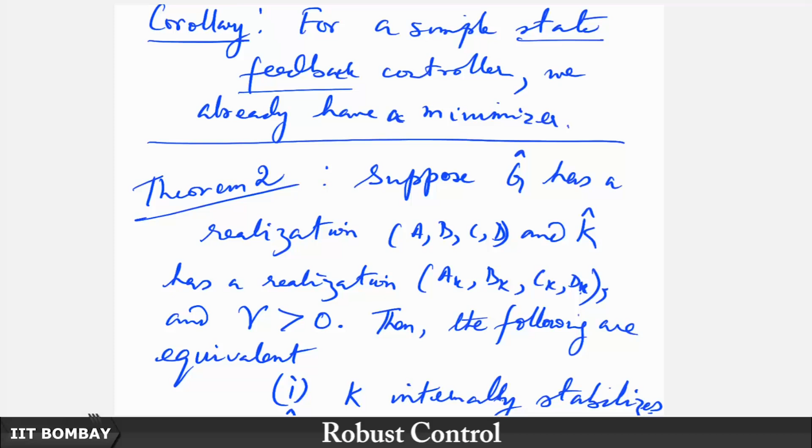If you now focus on the screen, this is the theorem. Of course this is not really a major theorem, but what it says is that if you have this G and the controller in this standard feedback configuration, then whatever will be the norm of that feedback system, it will be the same if you had just flipped the inputs and outputs at the plant and controller terminals, both of them. So you take this G prime and K prime, G hat prime and K hat prime, it would have the same norm exactly.

This has got everything to do with the fact that the way to evaluate the norm goes via the route of evaluating the observability and controllability gramian. When you use the controllability gramian, you are concerned with the trace of C x C Hermitian, where x is the controllability gramian. If you go via the observability gramian, it is B Hermitian y B, where y is the observability gramian. In other words, no matter which route you take, you will end up with having the same norm of the system. They are one and the same, by obtaining the trace of the corresponding gramians sandwiched between either the B and B Hermitian or C and C Hermitian.

So that is what we have seen earlier. Now this result should therefore come as no surprise. But the even bigger result, or the more important result that we saw prior to that - we will not go through the proof because we have spent considerable time on it - but even the main result actually takes quite some time to digest because it has got so many of these things. So let us quickly recapitulate what these subparts or these clauses entail.

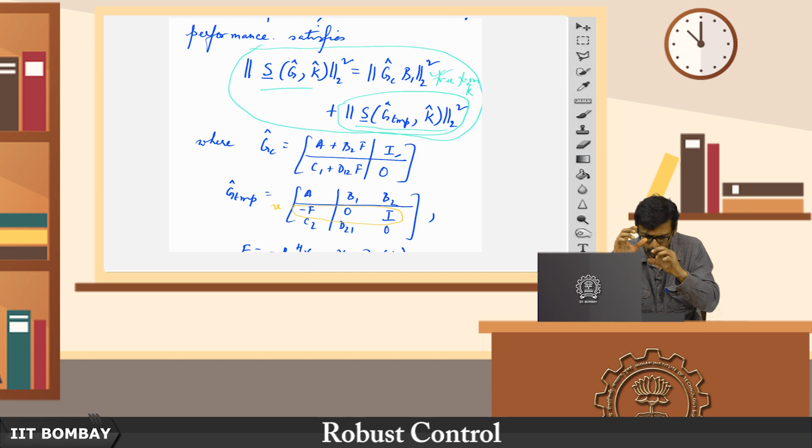Now, in the process, we say let us compose. Notice that what we are using to compose these new auxiliary plants, when we are composing G C hat, everything is known here apart from F. So F is an unknown, remember that. Then we are composing this G hat TMP, once again F is the only unknown, everything else is known. So it turns out that we compose these two auxiliary plants where there is one unknown, which is F.

So you might already be getting the hint that F is basically something we have to solve for, that we have to evaluate, which would allow us to design this controller in the first place. Now we say, what is this F? Here you see it is B2 Hermitian X. Again, B2 is something we know, but X is something we do not know. So this X is something we do not know here.

What is X? Now, X is given by the solution of this Riccati equation, which is constituted by the elements of the Hamiltonian HC. Now you ask, okay, what is HC? So the first step was what is F? In answer to what is F, we found that it is something that depends on X. Then we ask what is X? In answer to what is X, we are led to looking at this, what is HC? Now we see that HC constitutes of nothing that is unknown to us.

So if I now retrace my steps back, here is how the controller design should proceed. Just cut to the chase, here is the utility of the theorem. One thing is to understand the proof of the theorem, which is important, but it should also be apparent to you. You should not get confused in this jungle of words and variables and stuff, so much so that you lose sight.

So here is the deal. I give you a plant G hat. That means I tell you what A, B1, B2, C1, C2, D12, D21 are, and I say that this plant at least satisfies these conditions. Again, A, B1, C1 being stabilizable and detectable, along with A, B2, C2 also meeting the same conditions, is not very restrictive. In fact, that is the bare essential you need in order for a stabilizing controller to exist. So it is not too much of a demand.

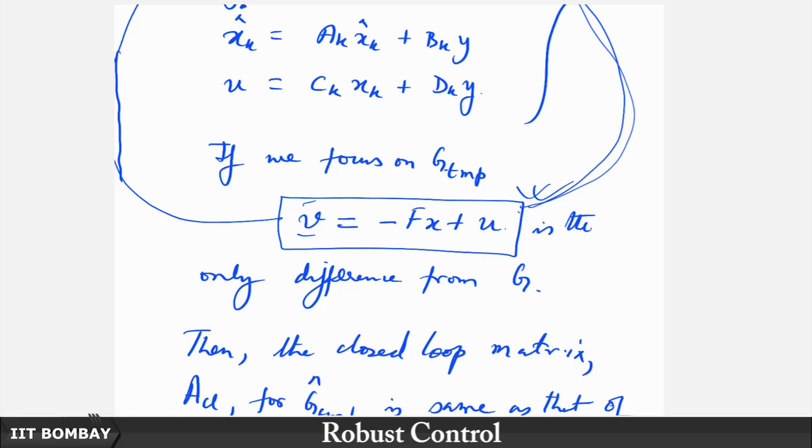So we did some more algebraic manipulations, and I am sure we did it in some sort of a hurry in the previous lecture. We cooked up this E hat, and you might be wondering where is this E hat coming from, why am I suddenly interested in something like this. It is like somebody has whispered something in my ear magically and I have come to know of it. That is not the case.

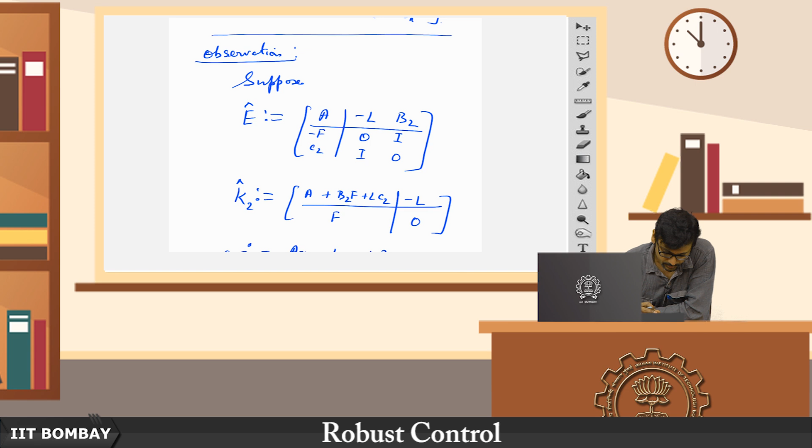So let us try and understand why this E hat was important. Maybe I should have done it a little later, but it is okay. We have already derived and shown that this particular E and K, the star product of E and K, has a norm equal to 0, where K is given by this particular controller.

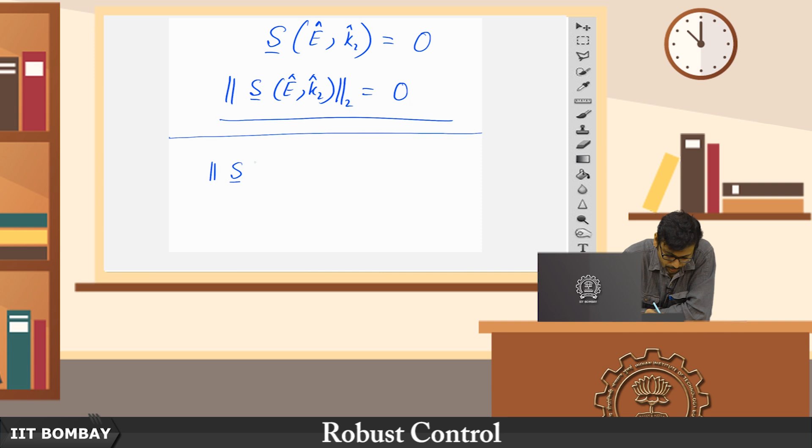Now how does this help? Notice what are we aiming to do? Let me draw a line and start today's lecture. So what are we trying to do? We are now concerned with trying to minimize the star product's norm, where the star product is between G hat TMP and K hat.

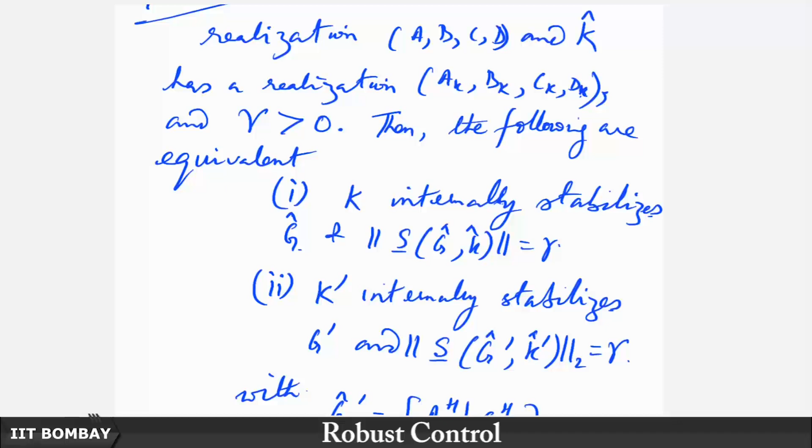I can get rid of the square here, but notice that we have already shown by theorem 2 that minimizing the norm of G hat K hat is the same as the norm of G hat prime K hat prime, where G hat prime and K hat prime are obtained by transpositions and Hermitian operations on the respective ABCD matrices. So A changes to A Hermitian, B changes to C Hermitian, C changes to B Hermitian, and D changes to D Hermitian.

That is what this prime operation entails, and in doing so, we have claimed that the norm does not change one bit. So therefore we can now essentially turn our attention towards restating our goal in a different language, which is tantamount to minimizing the norm of this star product G hat TMP prime K hat prime.

But you might wonder how does this help? Recall a previous lecture or a couple of lectures back, we had defined what this G hat TMP is. Based on our understanding of the prime operation, go back to the notes you have taken down in the preceding lecture to see what G hat TMP is, and you will observe that G hat TMP prime will look something like this: A replaced by A Hermitian, and whatever was in the place of the C matrix for G hat TMP will now be replaced with the Hermitian transpose of the C, or the B here. Let me just write it down, because that will make things clearer.

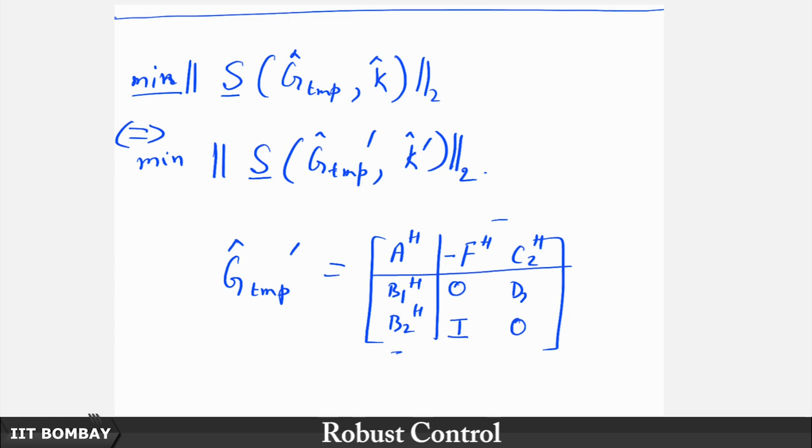And here we have B1 Hermitian, B2 Hermitian, which were sitting in this place here in the original G hat TMP. Also, we will have 0, 0, these do not change, but now instead of the identity here, we will have the identity here, and instead of the D21 here, we will have the D21 Hermitian over here. So, this is our G hat TMP prime.

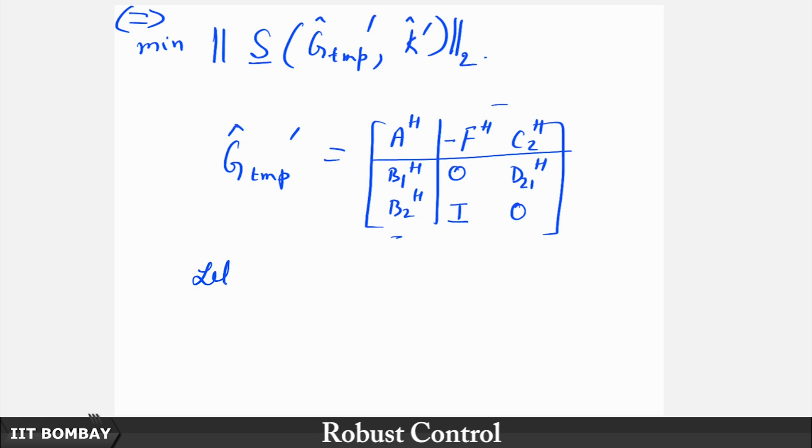And let us replace K hat with K hat prime, okay. So, what is K hat prime?

So, then now we turn our attention to this fellow. This is what we are now going to be interested in. Great, now what do we get?

In order to understand what this fellow's norm entails, the star product of G hat TMP, again you see this is totally contingent upon what we choose as our F here. So, maybe the F is known here, but now what are we going to decide? There is going to be something undecided, like the unknown here. Remember in the previous case we had the F which was to be decided. So, now we will also have to have some other unknown here.

So, eventually I ended up going back after all. So, here was this unknown and GTMP, and notice that this GTMP is now the original plant, whereas in this case the original plant was this. So, everything in the original plant is known. So, now we are saying that everything in our GTMP hat is known.

Instead of F we are going to call it L now. So, we are posing exactly the same problem here. Instead of G hat here, now we will start with G hat TMP prime, and apply the conditions that we had in theorem 1 exactly in toto, no difference whatsoever, because you see now that G hat TMP prime has exactly the same structure with everything being known now, because remember that F we now know.

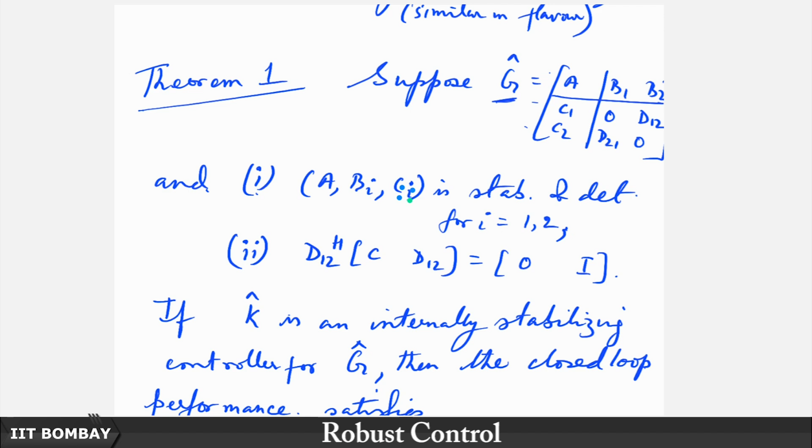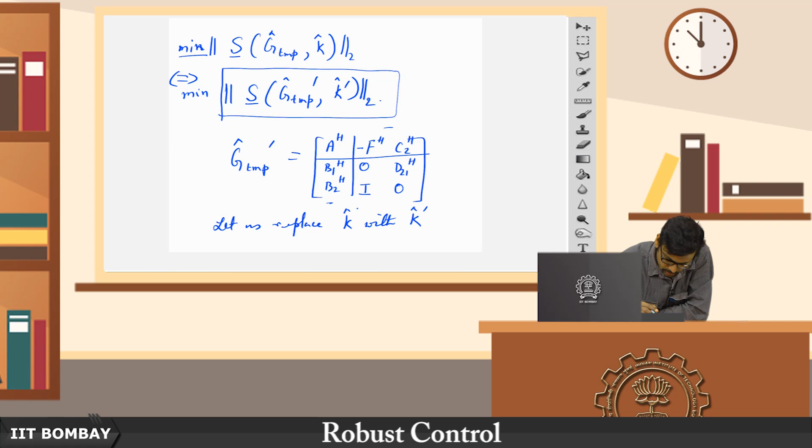It comes from X, X comes from the solution of the Riccati equation given by elements of HC, and elements of HC are again coming from the original plant. So, everything is known here. So, what I am saying essentially now is that this F that we have here, do not treat this as an unknown now, it was much later, here. So, now this F here is not really an unknown for us.

Now, we will have a new unknown which is L, which will be part of our GC. So, instead of calling it GC, let me call it GF. So, GF now in terms of the elements of G hat TMP and an unknown L. Earlier the unknown was F, now for plant being given by G hat TMP prime, the unknown will be L. What will that L be connected with?

The L will be connected with the B matrix, and precisely, to be precise, the B2 element, which is this. So, here goes. Notice very carefully, A Hermitian plus C2 Hermitian L, then you have the identity here, and this is going to be B1 Hermitian plus D21 Hermitian, that is this element coming from here, D21 Hermitian L. Notice in the previous case it was D12, but now the D12 element is replaced by the D21 Hermitian, and this was 0 like before. But this is our GF prime, GF, okay.

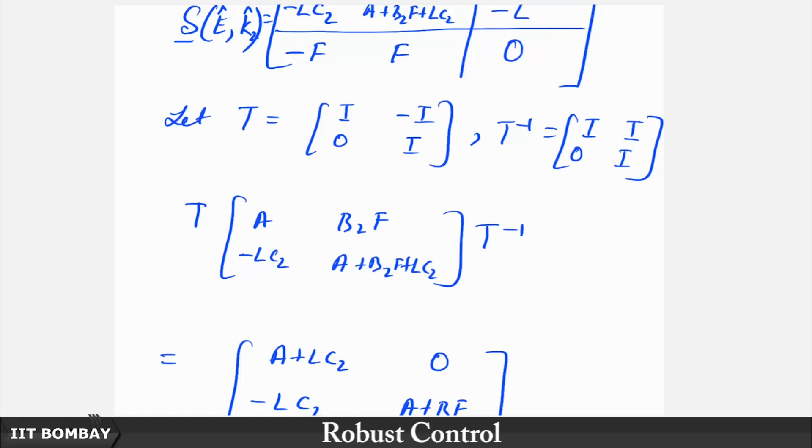So, now that we have this, what is the other element that we have? Now, remember it is like when we had started with G, we had two auxiliary plants that we got. One was this GC hat, which is whose place is now going to be taken by this GF hat prime, not just GF hat, but GF hat prime.

So, what we will now do is, we will have to find the G hat TMP corresponding to G hat TMP. Sounds a little confusing, right? Let me elaborate. On the left hand side here you have G hat, from which you compose an auxiliary plant G hat TMP. Now, you just sort of cover up this entire thing, hang on, you just cover up this entire thing here.

And you focus your attention only on this part. So, now to start with your plant is just this. So, this is now going to take the place of your G hat, or rather this prime of this G hat TMP. So, now for corresponding to a plant that is given by G hat TMP, what will be the G hat TMP now? And this is essentially the crux of the matter, and this will tell you why in the previous lecture we devoted some time towards understanding this another auxiliary plant from nowhere, apparently this E hat. So, observe, now the things will fall in place.

Before that, since we have already defined this GF hat, let me define GF hat prime. That is going to be A plus L C2, the I is going to come here, this is going to be B1 plus L D21, and this is going to be 0.

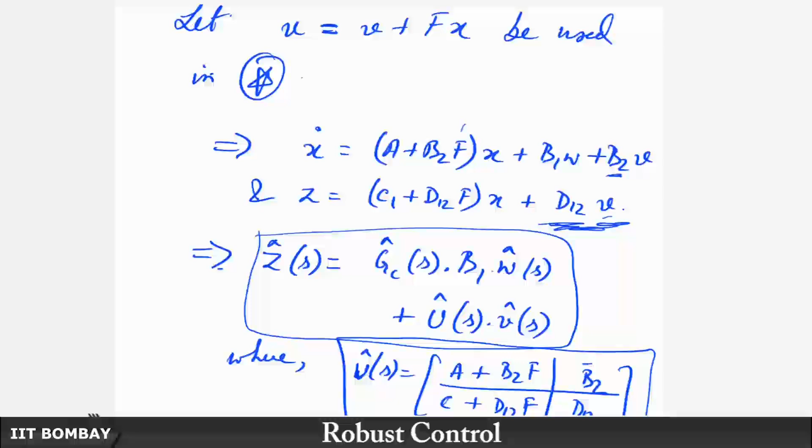Why F Hermitian? Notice very carefully, F Hermitian is sitting in the position of B1, and in the original plant's equation, in the original theorem that is, which we had proved the other day, yes, here it is. Just a minute, oh, this is the proof.

Notice that you had GC hat and B1. Now, GC hat is replaced by GF hat prime, okay, and B1 which was sitting in this location for the original plant.

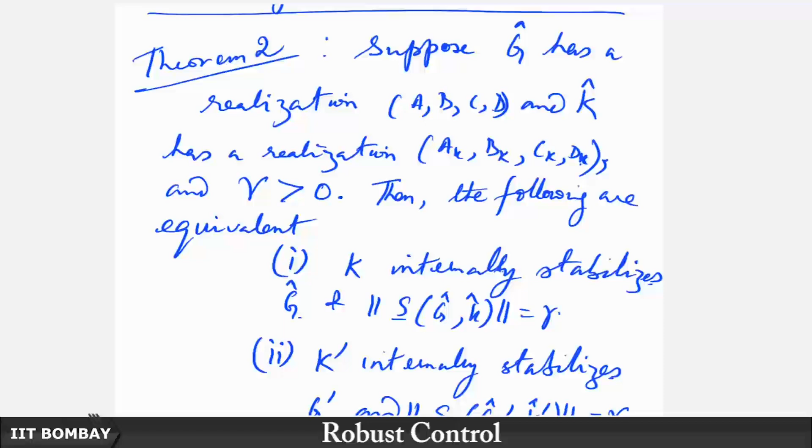Now, you are starting with G hat TMP. So, what is sitting in this location for G hat TMP? Well, it is nothing but F Hermitian rather, if I am not mistaken. Let me check. Yeah.

Where was I? Yeah. So you have minus F Hermitian. Of course, the minus 1 sign really does not matter, because the norm of the negative quantity, if you put it inside the norm, is always going to spit out a positive quantity, and anyway this is squared also, so it does not matter.

Now, what does it get added to? So that is the G hat TMP corresponding to G hat TMP, that is what I meant by it. So this is the funny thing. How did you get G hat TMP from G hat?

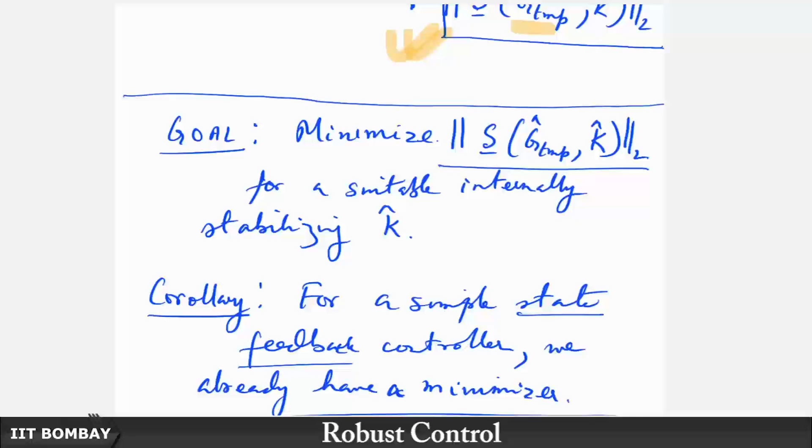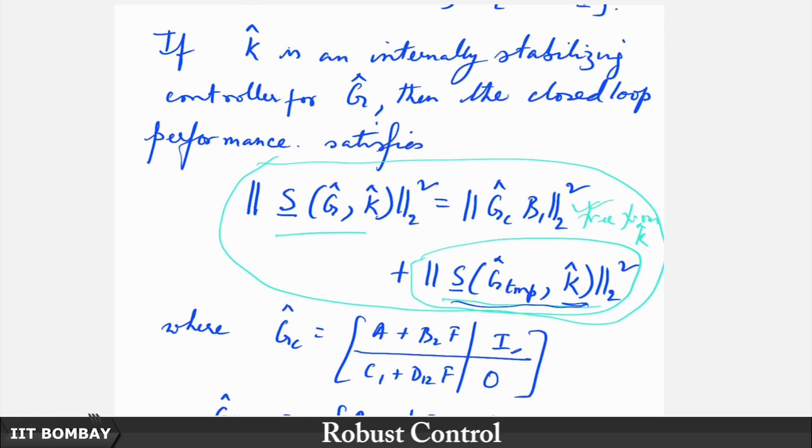Now, we are going to exactly do the same thing to G hat TMP prime to get its corresponding G hat TMP. In other words, when I had a plant, notice the structural changes we made to get G hat TMP from G hat. So what are the things that differ between G hat and G hat TMP? You see, G hat had A, B1, B2, C1, C2, 0, D12, D21, 0. And if you side by side place G hat TMP, A remains the same, B1, B2 remain the same.

The things that change are C1 gets replaced by minus F, which is an unknown. In our case, this minus F will be replaced by L. So that is going to be our unknown. Notice D21 remains the same, C2 remains the same, only the D12 position gets replaced by identity.

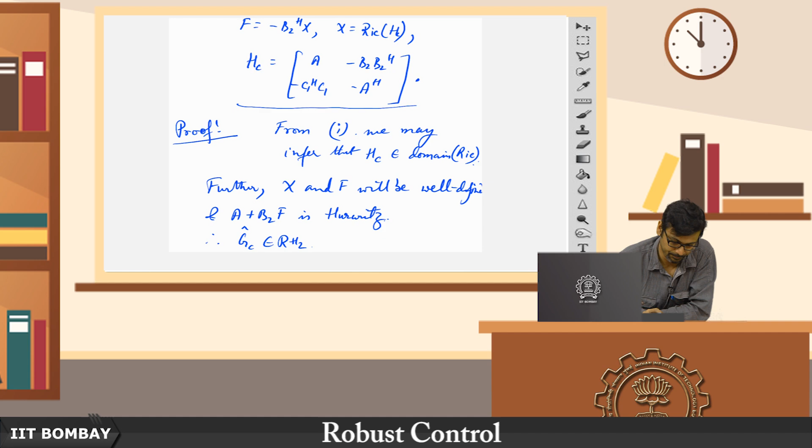So now if I look at what the corresponding G hat TMP corresponding to G hat TMP would be, I would get the norm of the star product between E hat prime, right, K hat prime, where E hat prime is exactly what we had defined in the previous lecture. Notice what was E hat?

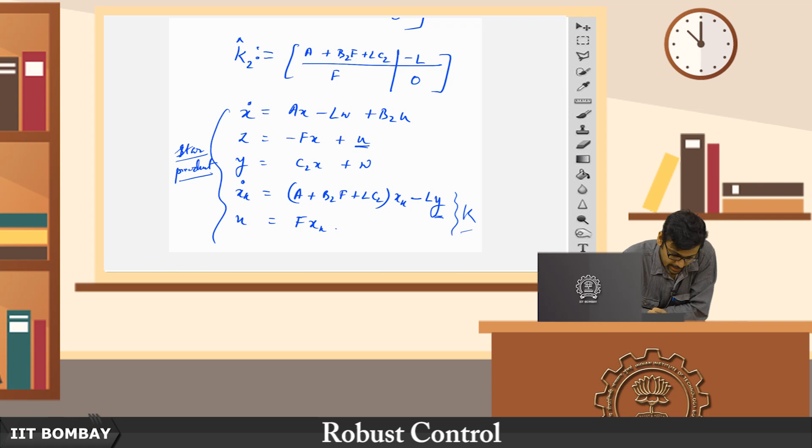Here goes E hat. So observe then what is E hat prime. This is exactly what we had defined earlier. We had almost pulled it out of thin air. We hadn't given any description. I just showed you that suppose you consider this auxiliary system, and I asked you to bear with me and take some things on faith.

So now if you take that on faith, you will notice what is sitting here. If you take E hat prime, you will get A Hermitian replacing A. This minus L and B2 will come in the place of C, so you will have minus L Hermitian and B2 Hermitian here, and in this place of B you will actually end up getting minus F Hermitian and C2 Hermitian. Of course, this identity and identity, it really wouldn't matter.

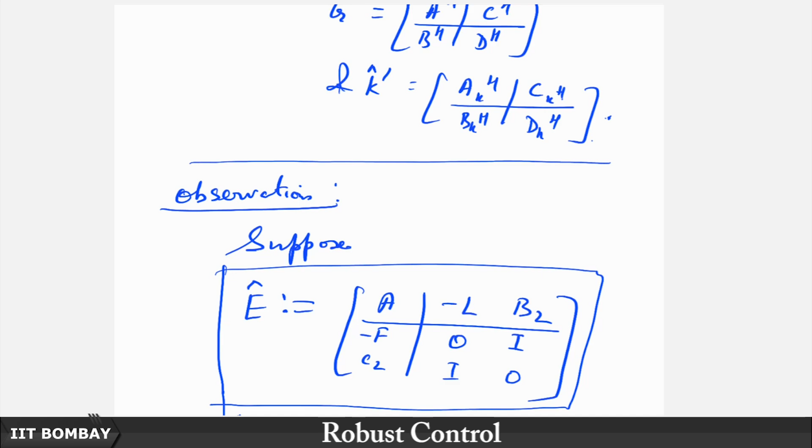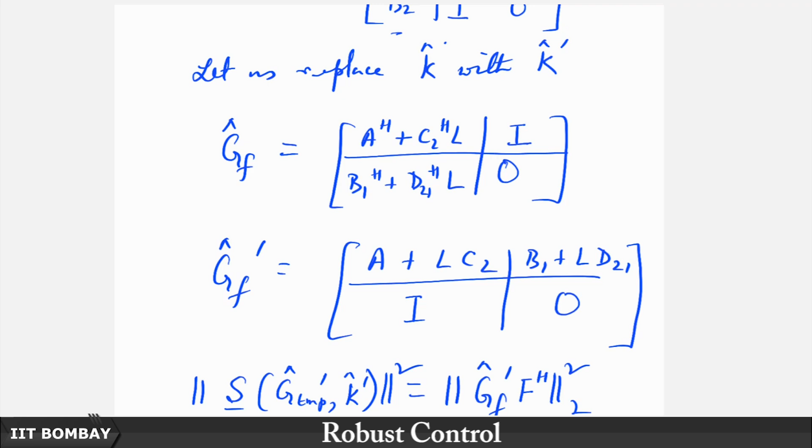So if you start with G hat TMP, then E hat, where E hat prime, sorry I missed this prime, E hat prime is going to be given by, so look at G hat TMP, you will have A Hermitian as before, and you will have the B part remains the same. So it is minus F Hermitian C2 Hermitian, minus F Hermitian C2 Hermitian.

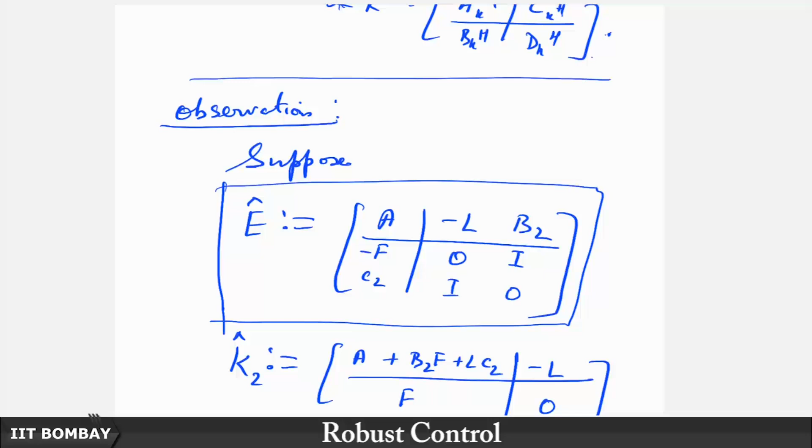What happens to the C? Just a minute. So let us look at how we went from G hat to G hat TMP, that will give us the clearer picture.

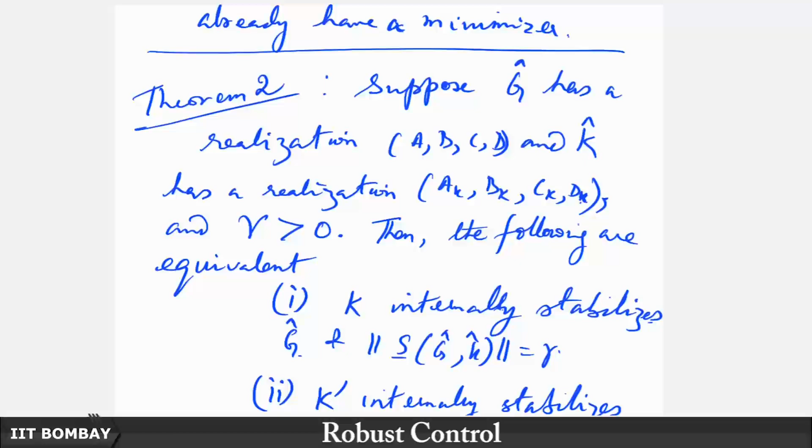Notice that the C got changed - the C2 position remained the same, but the C1 position got replaced by the unknown. Our unknown will be L instead of F, because F is known to us. So we will replace this with minus L, and of course this will be just B2 Hermitian, like it was in G hat TMP.

What happens to this? This element remains unchanged, but this element has to be changed by identity. So you will end up getting 0 I 0.

So now E hat is given by, you just flip the B and C matrices with their corresponding Hermitians - replace B Hermitian with C and C Hermitian with B. The D is also replaced by D Hermitian, but D here is already symmetric, so it matters not what you do.

And A replaced by A Hermitian. A Hermitian's Hermitian is just going to give you back A, this is going to give you minus F and C2, and this is going to give you minus L.

So, there is some mistake here - I have written down this entire thing, but earlier itself I had made a mistake. You see, it is not even matching dimensionally. So there should have been a Hermitian here in the E hat prime.

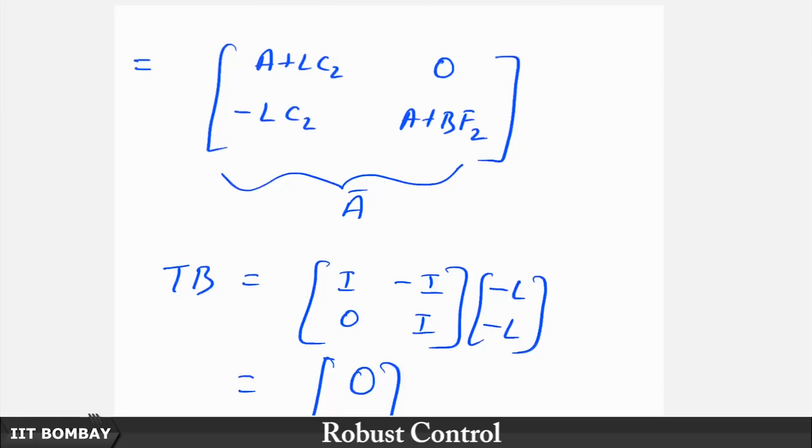If you look at what this E hat system entails, this E hat prime should have had the L Hermitian instead - it should not have been L, it should have been L Hermitian. So that is where we went wrong initially, and we needed to take this into account.

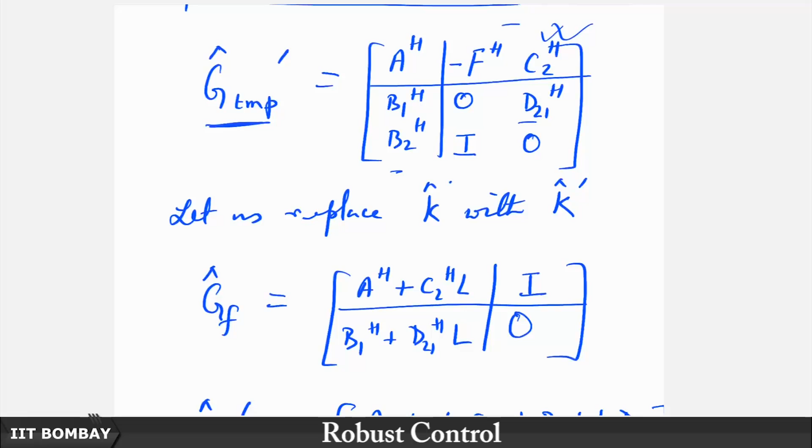Now, therefore, when you get back to this E hat, now it makes sense. You get back this E hat is equal to this minus L. That is actually the correct interpretation. So I had made a mistake here, please make a note of this. That is a correction we need to incorporate.

We already know that the norm of the star product of S E hat K hat is equal to 0. Therefore, the norm of the star product of E hat prime K hat is also going to be equal to 0, because these are after all one and the same - their norms are one and the same. These star products are not one and the same, but the norms are the same, as we have already seen earlier in one of the theorems.

So therefore, we can now safely claim that we can get rid of this term, because its norm is after all 0. This implies that the norm of the star product of G hat TMP K hat prime, G hat TMP prime K hat prime, squared - it matters not whether you square or not really, because there is only one term now. So you can just take the square root on both sides.

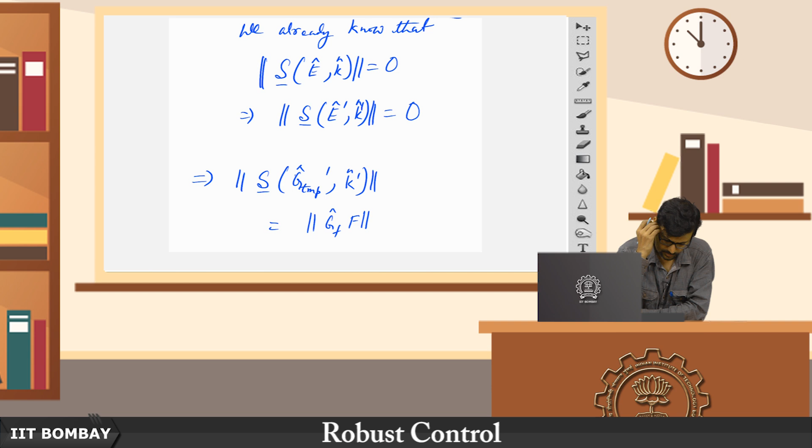It is just going to be g hat f. Now you can apply the prime on both sides again. So we apply the result that if you take the prime on both sides, this is going to be just g f hat f. It will really not make any difference. So this is what it is.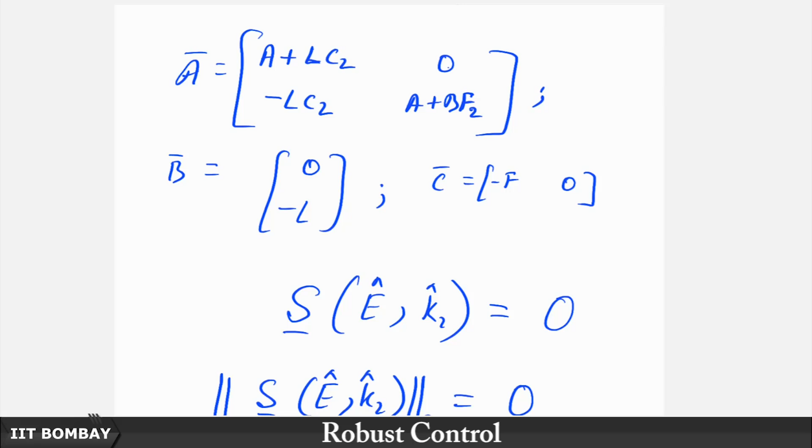So now, in view of this entire discussion, what can we claim? The main synthesis result - now we are in a position to summarize this. The complete synthesis result. What we did the other day was not really a complete synthesis result. Remember that theorem 1, as we are calling it, is incomplete in the sense that we are only concerned with the state feedback part.

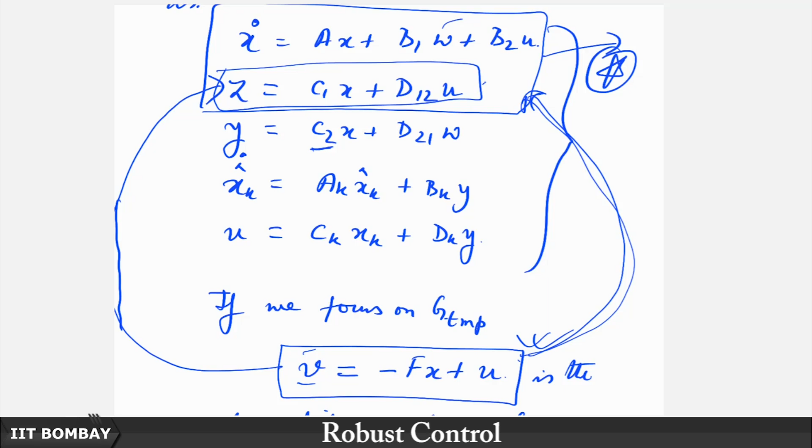Here what we did was we assumed that the states were available to us for our controller synthesis, so we can just use a state feedback, and that is it. But in general you will not be fortunate enough to have access to all the states. So the complete synthesis will involve designing a controller based on the output that you can access from the plant, and not necessarily explicit information about the states.

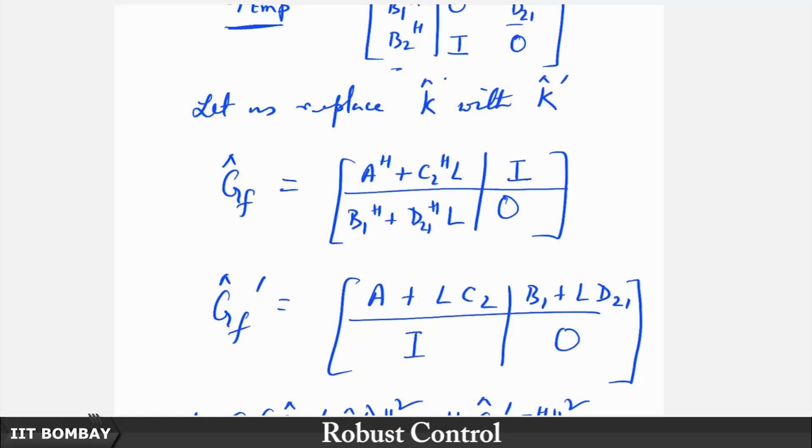So that is why now what we will see is that there is this observer based feedback which does indeed give us this solution to this H2 optimal synthesis problem. So here is the main result.

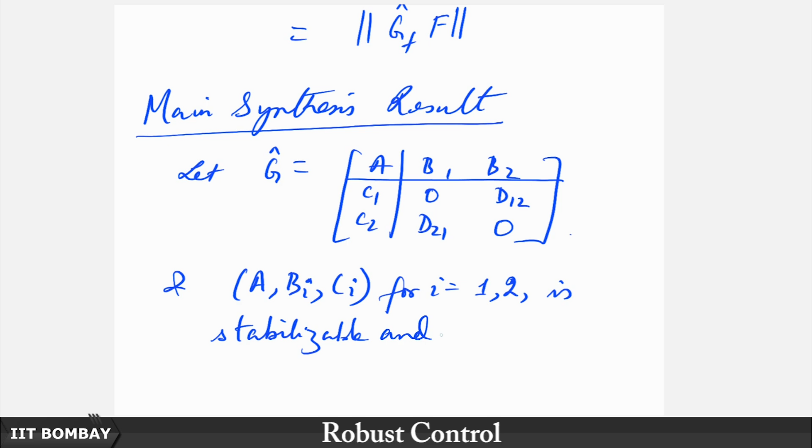Let G hat be the plant given by A, B1, B2, C1, C2, 0, D12, D21, 0 like so, and A, Bi, Ci for i is equal to 1, 2 is stabilizable and detectable.

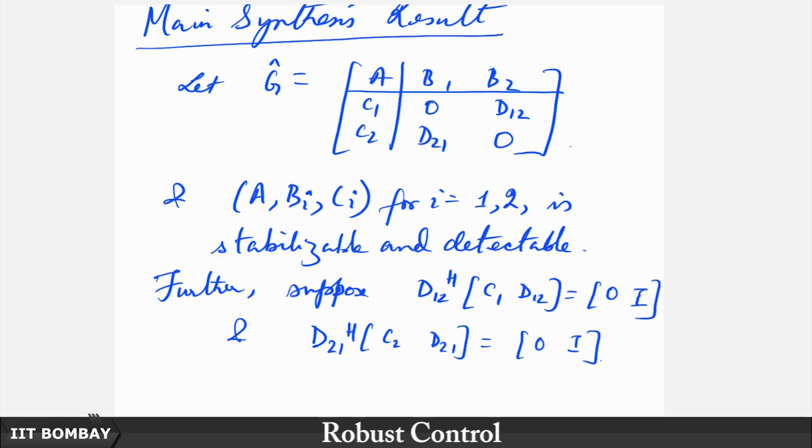Further, suppose D12 Hermitian C1, D12 is equal to 0 I, and D21 Hermitian C2, D21 is equal to 0 I. Optimal in the sense of H2 optimal.

So optimal controller is given by K hat is equal to A plus B2F plus LC2, minus L, F, 0.

So now we will fill in the gaps. Once we have stated this result, the proof will really entail almost nothing. The only thing the proof will require us to probe is where this L is coming from. As you might guess, just like F came from the solution of a Riccati equation, L will also come from a corresponding solution of some suitable Riccati equation.

And that will be mentioned in this result. So this result basically will tell you everything you need to know about designing the optimal controller, with L equal to minus Y C2 Hermitian, F equal to minus B2 Hermitian X, where Y is equal to the solution of this Riccati HF, again as before.

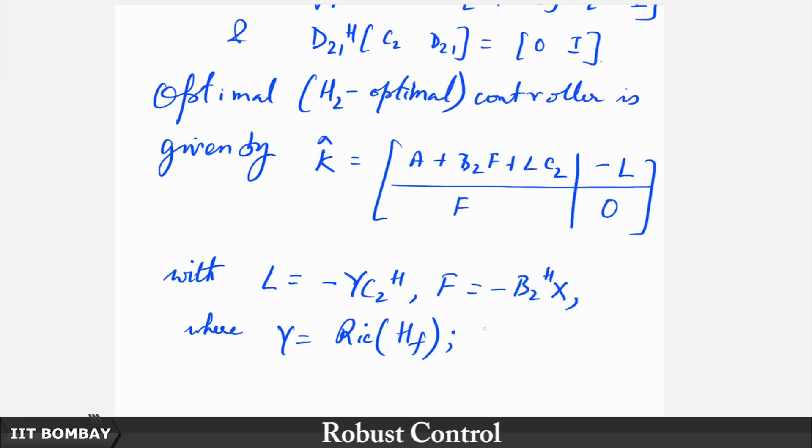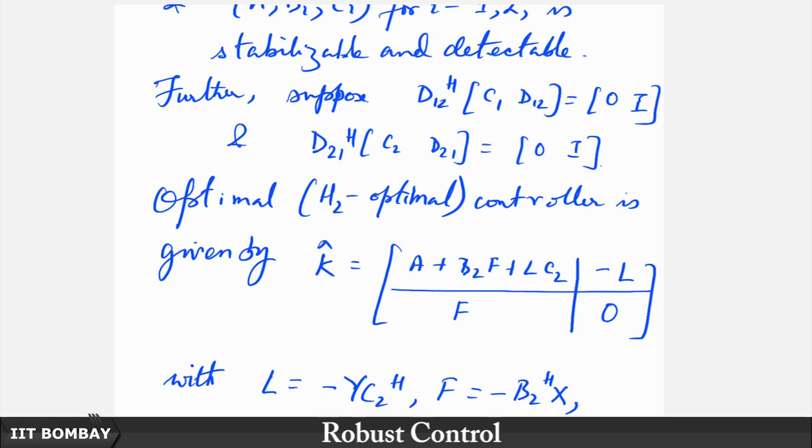We are going to state this first and then explain, but while designing you will have to follow the opposite route. So again, I am just telling you right up front what this k hat is going to be, this controller design. But then that really will not allow you to design it right away, because both F and L are unknown to you. And then in the next step I say, oh look, L is this, F is this.

And again you might say, okay, but what is this Y and X then? So then I say Y is the solution of the Riccati equation given by the Hamiltonian HF, and X is the solution of the Riccati equation given by the Hamiltonian HC. And then you ask me, what is HF and HC?

So this is the final step, and HF and HC had better not include anything that is not part of plant parameters, and indeed that is going to be the case.

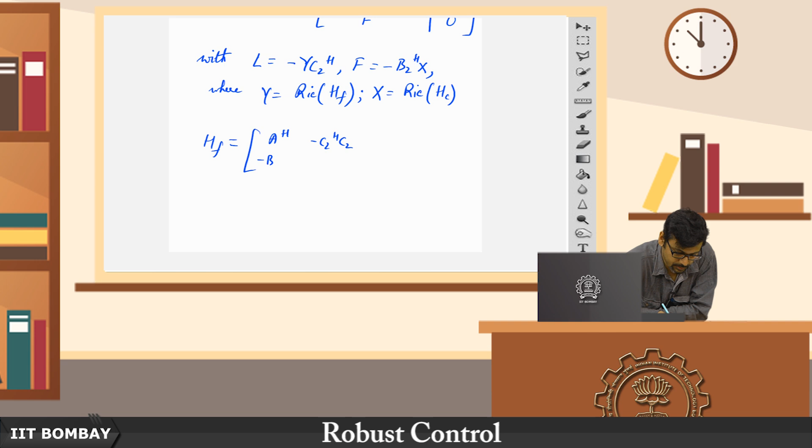So this is what H2, you might already be able to guess what HF and HC will look like. HF is equal to A Hermitian minus C2 Hermitian C2 minus B1 B1 Hermitian, and this is minus A. HC is equal to A minus B2 B2 Hermitian, and then minus C1 Hermitian C1, and this is going to be minus A Hermitian.

Okay, so this apparently gives us the solution to the problem. So what do you do? You have a plant given by A, B1, B2, C1, C2, D12, D21, where the corresponding ABC triplets are stabilizable and detectable, and suppose these two conditions are also met. Then what is the first thing you do?

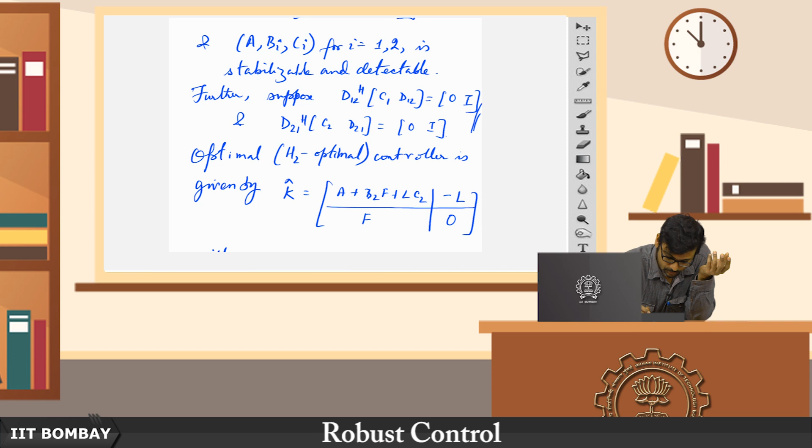Well, based on the plant parameters, cook up these two Hamiltonians. Once you have these Hamiltonians, remember, observe that these Hamiltonians do not require anything other than the plant parameters. So cook up these Hamiltonians.

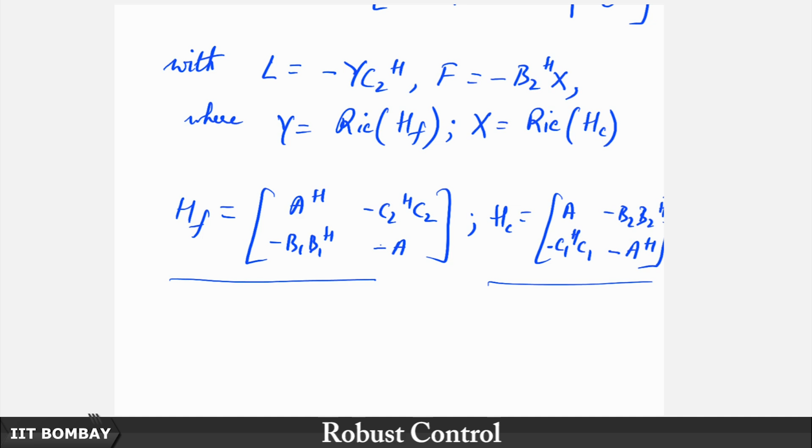Once you have these Hamiltonians, you know that Hamiltonians such as these do belong to the domain of the Riccati operator as we have defined. So corresponding to both of them, you get the solutions to the Riccati equations. Suppose the solution corresponding to HF is given by Y, and that corresponding to HC is given by X. So then you can obtain Y and X.

Next step, so now basically the process is going up like this. So next step, you just plug in Y here, get L, plug in X here, get F. And then once you have done that, all that you now require to do is compose this controller. This is your desired controller.

Now that F and L are known, this is the A matrix of your controller, this is the B matrix of your controller, and this is the C matrix of your controller, and of course it is a strictly proper controller, so the D is going to be 0.

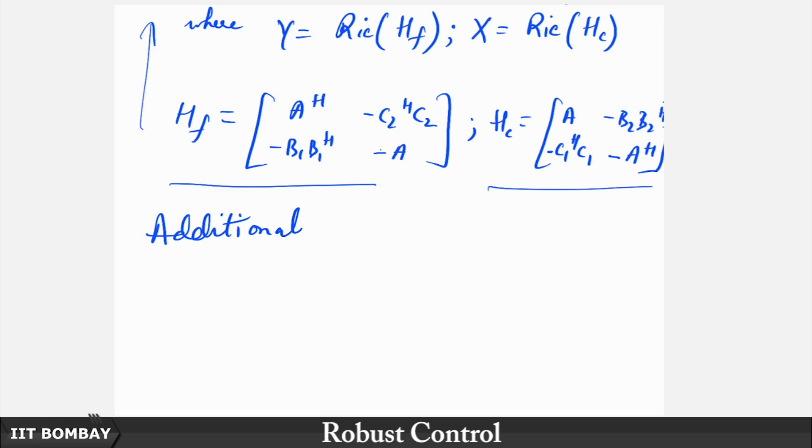And this gives you the optimal controller, but what is the optimal value of the performance metric? We will not just stop at this point, we will also say additionally, if you put this controller in place with the plant and look at the star product.

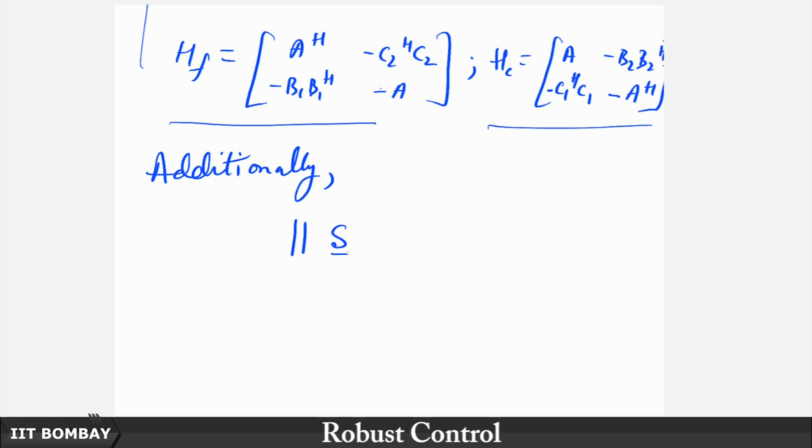So additionally you will have the performance achieved given by, so here it goes, it is the two norm of the star product of G hat, K hat, squared, given by equal to G hat C B1, which of course we had already seen we could not do anything about, plus we had the star product of G hat TMP, which was an auxiliary. But then we immediately, just preceding this result, saw that the two norm of that G hat TMP could be further minimized.

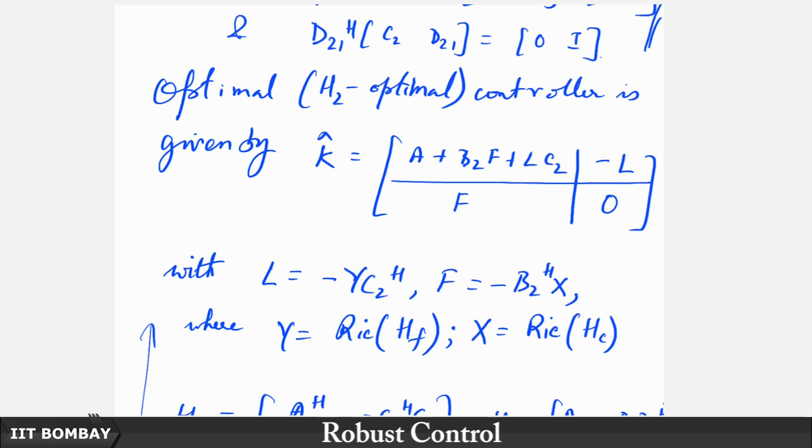And in fact, with this particular choice of controller, it should come as no surprise. We had not described this part though in our previous result, so now we also outline it. This is exactly following the same line, you can just check, we are just mimicking the steps, in other words. It is just looking a little cumbersome, but we just put our head down. In fact, you can take it as an exercise to write this logical flow in the opposite direction to get these results.

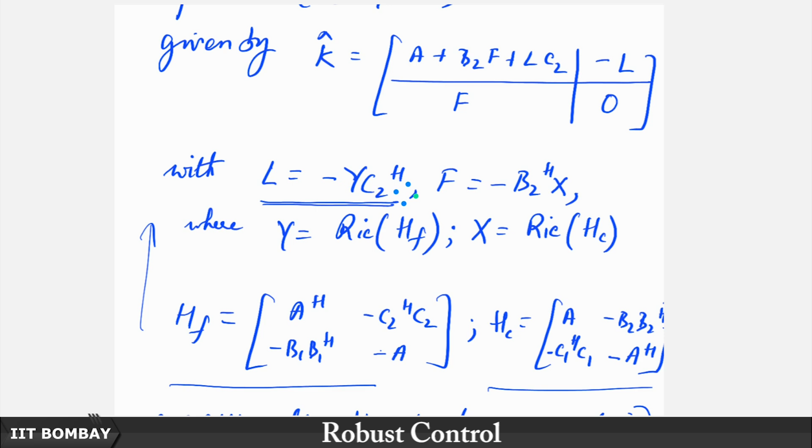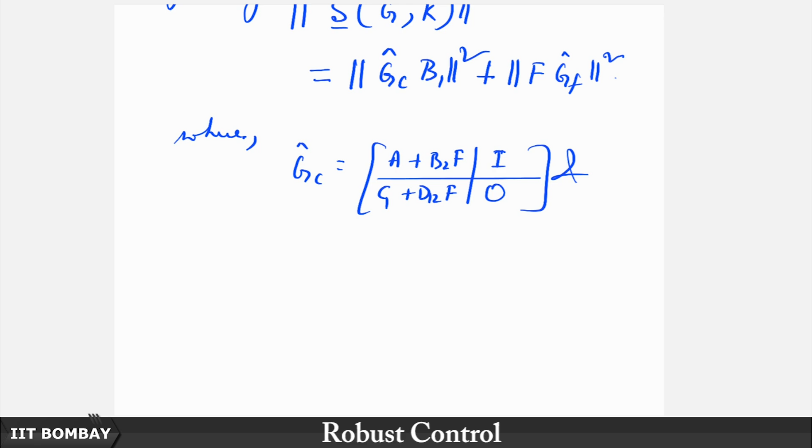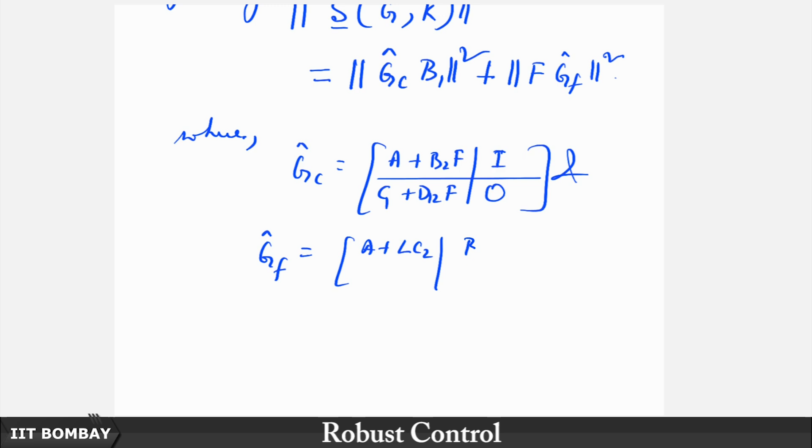And G F hat is given by A plus L C2, the B matrix is given by B1 plus L D21, the C matrix is given by identity, and the D matrix is also given by 0 again. Okay, so that is it.

If you put this GC, multiply with B1, the square of the norm of that, plus if you put this F with GF hat, then you sum together the square of their norms. It is like some Pythagorean identity, it looks like. That uncanny resemblance is because you are dealing with an inner product space. It is basically the sum in two orthogonal complement spaces.

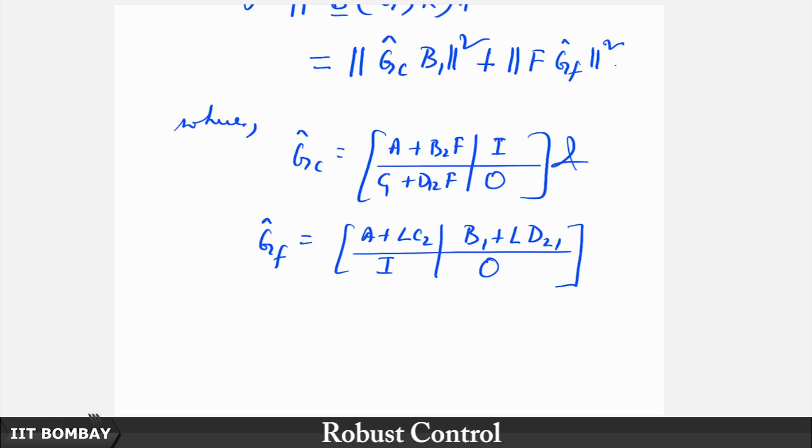You can take that as an exercise to check that also. One of them comes from a subspace and the other comes from its orthogonal complement. So these are basically projections in two orthogonal complements, two mutually orthogonal subspaces. Anyway, that is a bit of mathematical sophistication, but to understand the problem, here it goes.

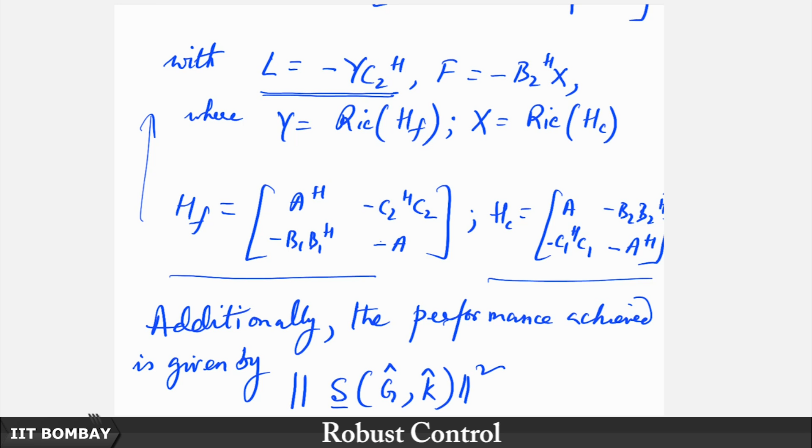So this is basically the minimum, the best controller. If you plug in this controller here in the star product on the left, the controller that we have just outlined previously, you will immediately see that it turns out to be like so, and this is indeed the minimum, the best that you can do. And we have shown it is the best.

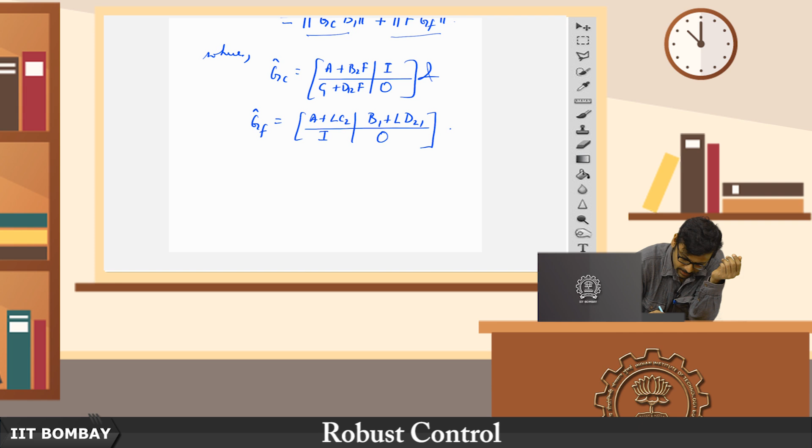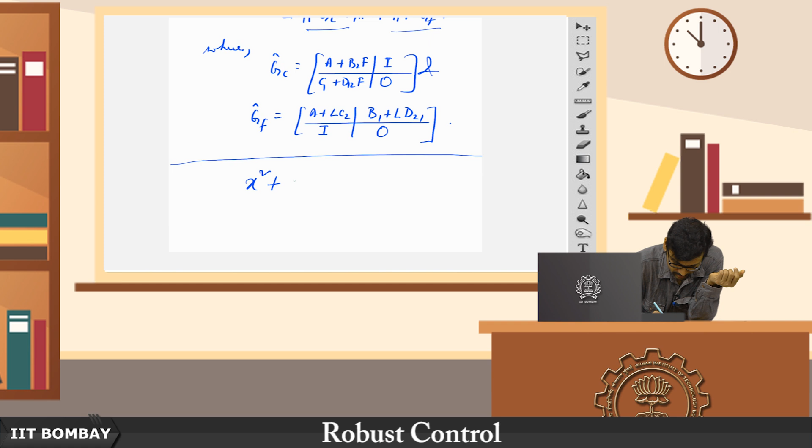Remember, when you try to minimize something, even when we were young, this approach that I have taken, if I might draw an analogy to what we have done here today, I would say it is like I give you a polynomial. Suppose I tell you that this is x squared plus 20x plus 200.

Now, of course, if you want to minimize this polynomial, you can go ahead and evaluate f prime x, the derivative with respect to this, and you can get that x is equal to minus 10. Then you go ahead and check that f double prime x is equal to 2, which is greater than 0, therefore x is equal to minus 10 is a minima. So that is using calculus.

But on the other hand, you do not necessarily need to use calculus. What you could have also done was take f x is equal to x squared plus 20x plus 100 plus 100, and you can argue that this is x plus 10 whole squared plus 100.

So if you are interested in what is the minimum value of f x in the second approach, you do not really need calculus. You can just say this is the sum of two squares, so put x equal to minus 10. One part of it is free from x, the other part contains x. So if you want to minimize this, you put in x equal to minus 10, and you will see that f x min is going to be equal to 100, and that is exactly what we have done here.

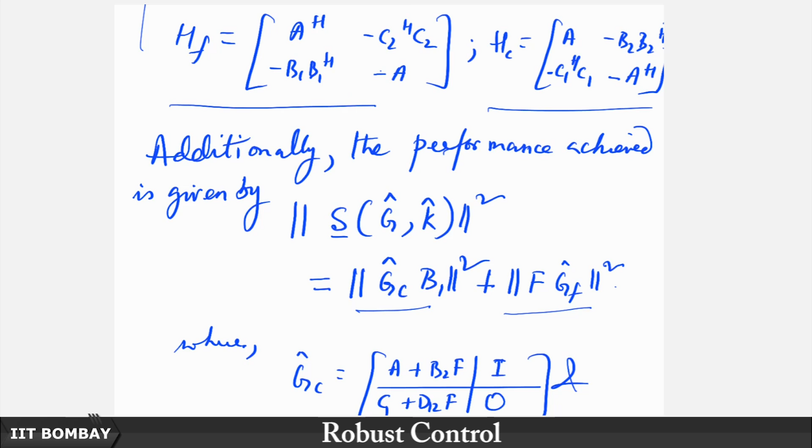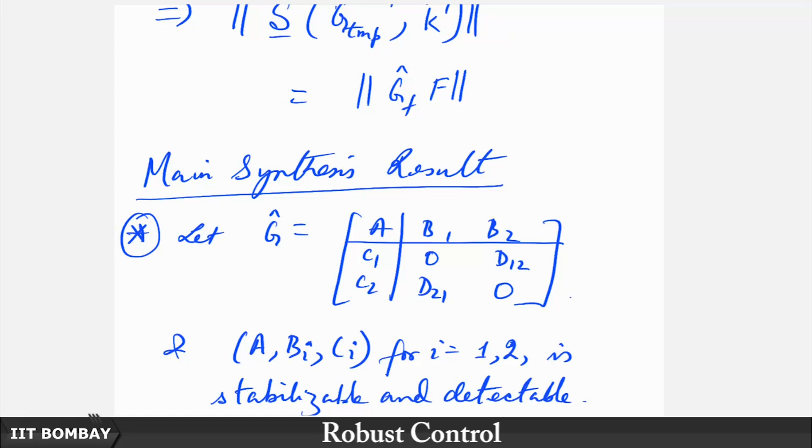So this is just kind of like a simplistic example that you are familiar with from your high school days, and what we are doing here is exactly the same. So we had one norm on the left hand side, we could split it up into a sum of two other norms, squares of two other norms. So all of these are positive quantities.

The crux of this proof follows exactly the same reasoning as here. We can write this f x as sum of two positive quantities. X plus 10 whole squared is positive, 100 is positive. The only term that we can influence by using x is the first term, 100 cannot be influenced. So there is nothing I can do, it is at least equal to 100. Now, can I make it exactly equal to 100?

Well, if I am allowed to choose x equal to minus 10, then I can just apply that and make it exactly equal to 100. So that is the best I can do. Exactly the same line of reasoning, I hope you agree that there is nothing really left to prove here anymore.

Whatever was there, we have done it. So essentially, if you ask me whether we have completed our H2 synthesis problem, this is it, we have.

But I will not stop here. I will give you another flavor, another approach towards this minimization, and show you how this same problem can be tackled using LMIs, linear matrix inequalities. So the same thing we can do now using an LMI approach.

So that by the time we are through with these three controller design paradigms - one is the internally stabilizing controller using Youla parameters, and then this H2 and H infinity - we will begin to see that when we have these optimizations, we can always formulate them as convex optimization problems, and that is always a good thing because you can code them nicely in a computer as a convex optimization problem.

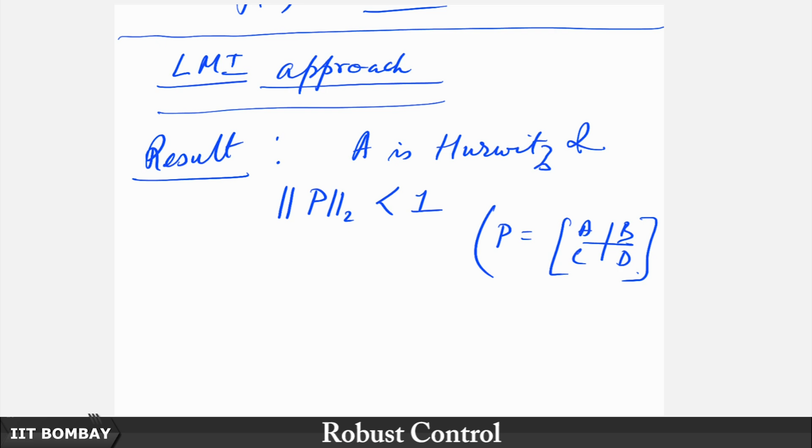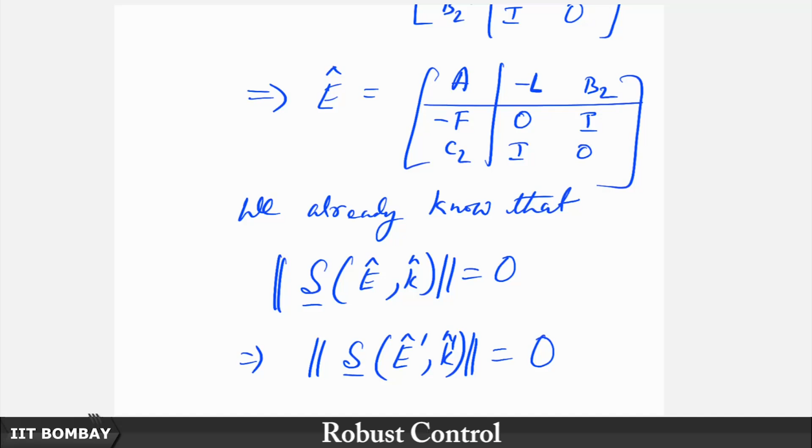So this statement that A is Hurwitz and the second norm of P is less than 1 is actually equivalent to - because look, this is all that we want to do, right. Through all this minimization problem and everything that we have done, this has throughout been our goal: that this A matrix had better be Hurwitz, that is, it is internally stabilizing, and we want to minimize some performance norm. So minimizing some performance norm - and if you might say, okay, then what is so special about 1? There is nothing really special about 1.

So if you want to minimize this beyond a certain point, make it lower than a certain point, then scale it up. If you want fx to be less than 2, then you can actually say that I want half fx to be less than 1. It is the same thing, no? So that is exactly the reason why, without loss of generality, we have put this 1 here on the other side. There is nothing other than that apart from that.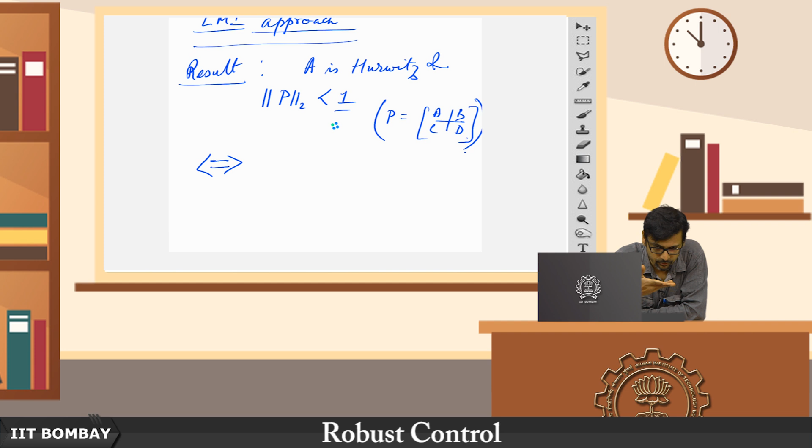So now this problem, I am sure you will agree, the way it has been stated in the first line is tantamount to how we have already formulated the classical problem here.

But now this turns out to be equivalent to saying that there exists X, symmetric or Hermitian, greater than 0, such that trace of C X C Hermitian is less than 1, and A X plus X A Hermitian plus B B Hermitian is less than 0.

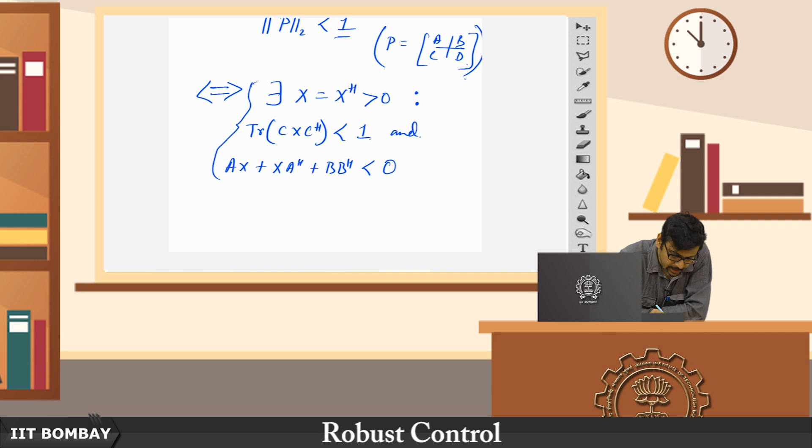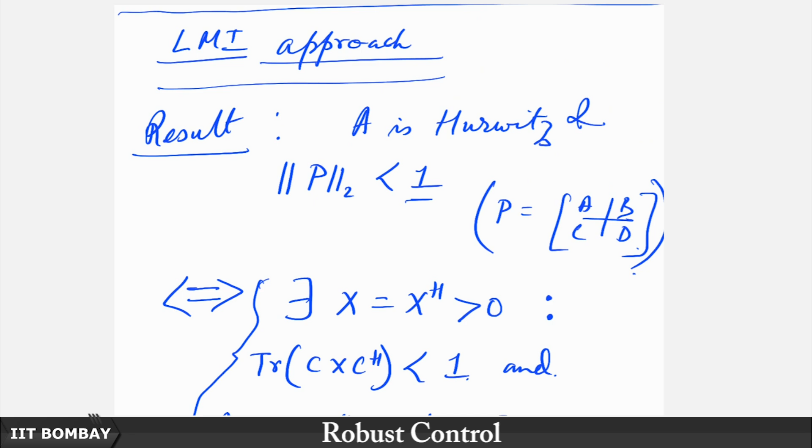Why is this second formulation important to us? Because this already has the makings of an LMI based formulation. This first part is exactly how we have formulated our H2 optimization problem. But the second part - if we can now show, if you can prove this result that this is indeed the same - then we can carry on with this second formulation, and say that once we have solved the second problem, we have actually solved the first problem. But the second problem already has inbuilt within it this LMI based formulation.

So let us try and convince ourselves that this equivalence of these two formulations is indeed true. We will first take the only if part. So what we say is that trace of C X C Hermitian is less than 1, and A is Hurwitz.

This is of course true, where Xc is basically nothing but the controllability Gramian. So you know that trace of C Xc C Hermitian is nothing but the H2 norm of P. So the moment I am saying the H2 norm of P is less than 1, I am essentially saying that this trace is less than 1, and A is Hurwitz is just a restatement of the same fact.

So this is given to us. We have to show that it is the same as saying this statement, you agree, and now we have to show that this statement is also the same as what we are claiming in the second part. Okay, so notice that...

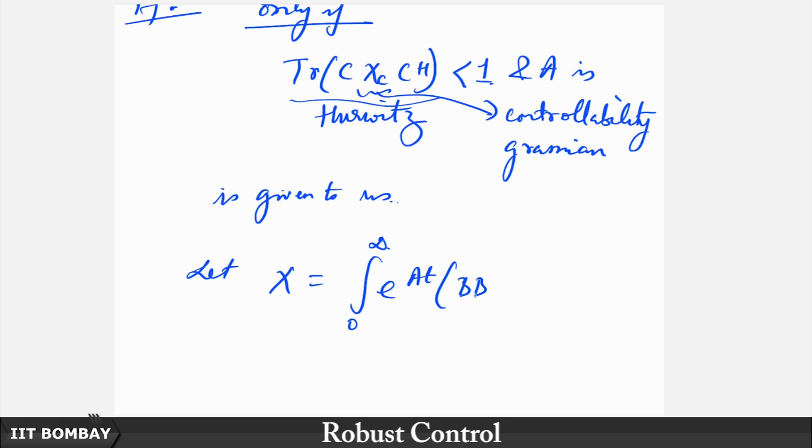Let X be defined as the integral from 0 to infinity of e^(At) (BB Hermitian + epsilon I) e^(A Hermitian t) dt. X is continuous in epsilon, and for epsilon equal to 0, X is equal to Xc. Of course, if epsilon is equal to 0, then X devolves to the controllability Gramian itself.

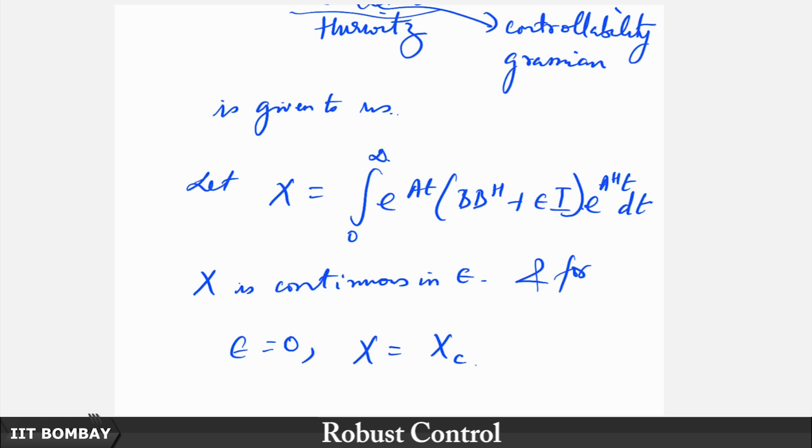So it is obvious. Now the key to our argument is continuity. Remember, Xc is the controllability Gramian, and because we know that the H2 norm is less than 1, therefore when you plug in X equal to Xc here, it is obviously less than 1. That is what we have just convinced ourselves, right.

Now by continuity, we may observe that... what do we observe? Continuity in epsilon, we may observe that the trace of C X C Hermitian is also less than 1.

So if you see, X and Xc are chosen to be very close to one another, they are actually related by this, because of continuity. If you keep changing epsilon by small amounts, X will be in a small enough neighborhood of Xc. So if X is very close to Xc, then the trace of C X C Hermitian and C Xc C Hermitian are also going to be very close. So you can always choose some X close enough to Xc such that that trace is also less than unity.

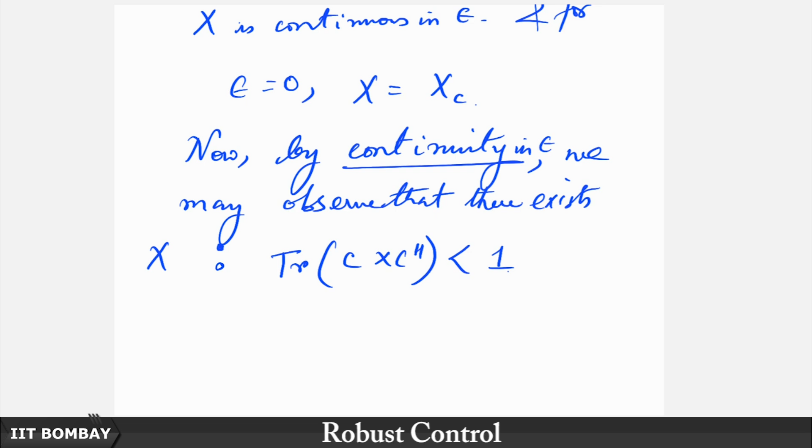So there exists X such that... where X satisfies: AX plus XA Hermitian plus BB Hermitian plus epsilon I is equal to 0.

You can just check that if you plug this in, I leave that to you as an exercise. So you take this as AX, that means it is a derivative. So AX plus XA Hermitian is basically nothing but a derivative of this term. That is what it is. And then you apply plus BB Hermitian, and you will see that you will be left with just minus epsilon I. You perform the integration with the assumption that A is Hurwitz.

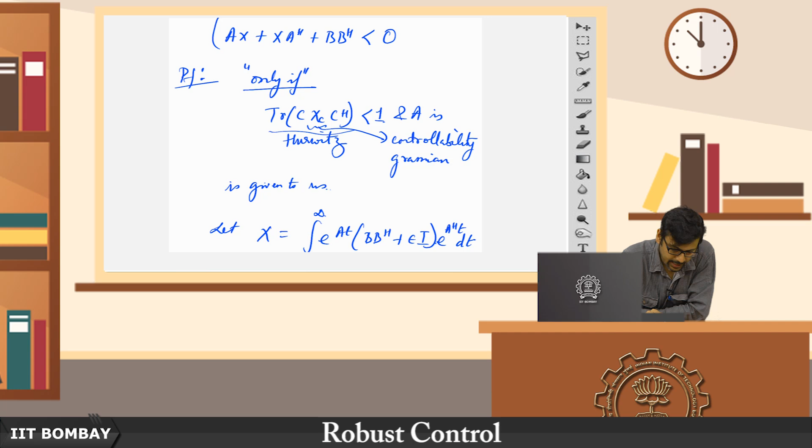So this is true, but this implies that A is Hurwitz. So therefore we are done. The moment you say that the H2 norm is less than 1 and that A is Hurwitz, this readily follows, then this part becomes negative definite for any small enough positive epsilon, because this is then negative definite, because this is equal to minus epsilon I, right. So you will agree that this is indeed the case. So we are done with the only-if part.

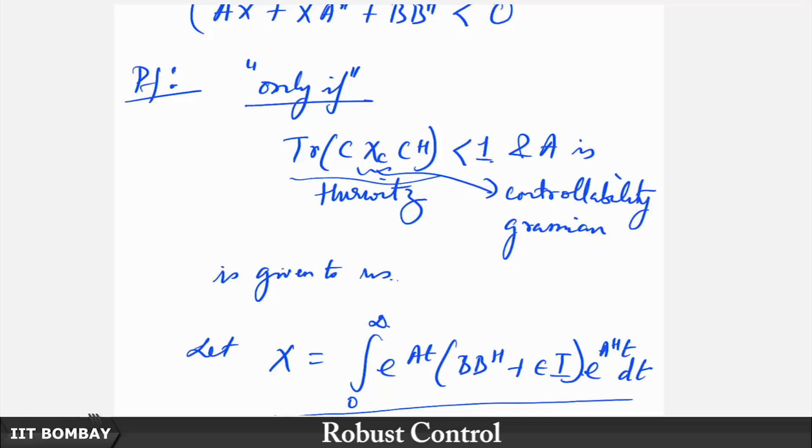Now we go to the if part, okay, the necessary part of this proof. So what is given to us? There exists X such that AX plus XA Hermitian plus BB Hermitian is less than 0, and that the trace of C X C Hermitian, which is what we have claimed as part of the second problem, notice, is also less than 1. Okay, so this is what we have to show.

Okay, and obviously note that A is obviously Hurwitz. You must be very careful when we make claims like 'obviously', and ask yourself if they are indeed obvious. Why do you think this is obvious? Well, for one, you immediately check that AX plus XA Hermitian, and I would also say that maybe there exists X which is positive definite. So the moment you have this, it means that AX plus XA Hermitian is less than some negative definite matrix, so it is also negative definite. So there exists a positive definite X such that AX plus XA Hermitian, which is the Lyapunov equation, is negative definite. Therefore it is obvious that A is Hurwitz. So that obvious part follows from this observation.

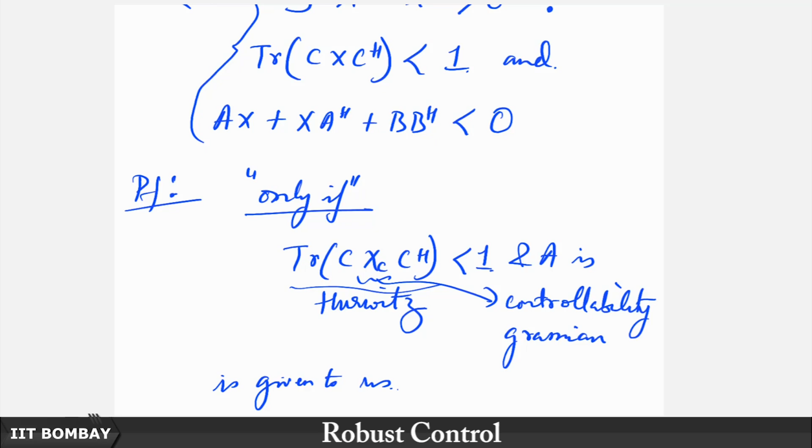Okay, so Hurwitz is given. Notice that the first problem says A is Hurwitz, that we have already seen. Now we have to show that this also means the second part of the problem is also going to follow from this. Why? Again, when X meets this condition, X is called the generalized controllability Gramian. It does not meet the strict equality, but it is basically something that satisfies the inequality.

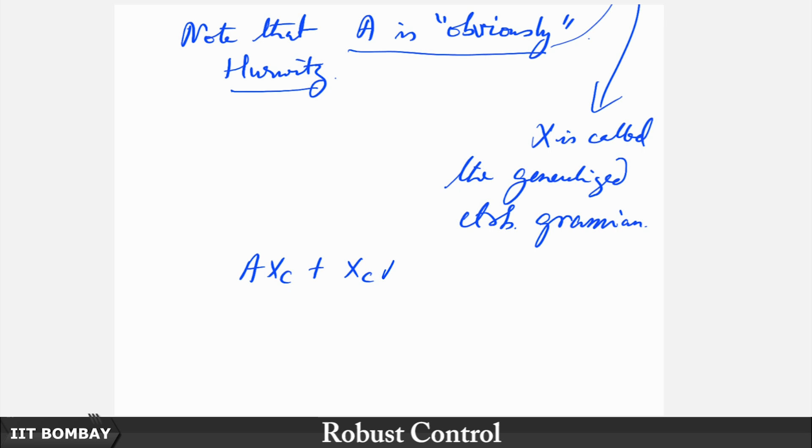So what happens then? Notice that A Xc plus Xc A Hermitian plus BB Hermitian is equal to 0, and AX plus XA Hermitian plus BB Hermitian is less than 0.

So, if we subtract the first one from the second, what do we get? We get Ax minus xc plus x minus xc A Hermitian is less than 0, where notice that both x and xc are symmetric or Hermitian matrices, and this overall thing is negative definite.

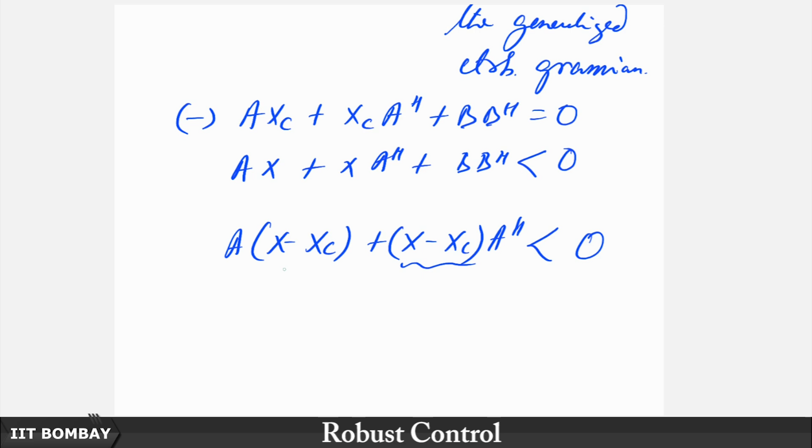So, if this overall thing is negative definite, then let us call this x tilde; x tilde is greater than 0, because A is Hurwitz. So, if A is Hurwitz, then this x tilde is greater than 0. So, if x tilde is greater than 0, this means x is greater than xc.

That means C x C Hermitian, the trace, is greater than or equal to C xc C Hermitian. But what do we already know? We know that this is in turn less than 1, this trace, but this is less than 1.

This is given by the formulation of the second problem, this inequality. This means that trace C xc C Hermitian is less than 1, implying that the H2 norm of P is also less than 1. So, when you have the second problem formulated like so, you already also have the first problem's conditions embedded within it. So, both these problems are one and the same.

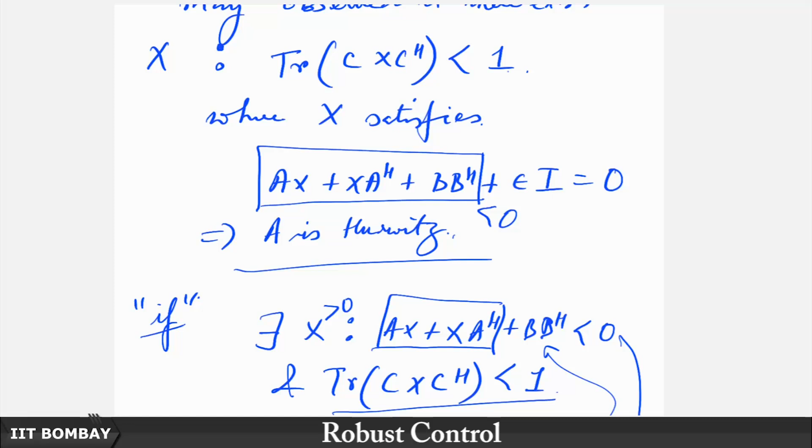So, if we can now show you a method to obtain a solution for this formula, it's not really completely an LMI, it's not very obvious to see yet, but you already see a hint of an LMI in the sense that there is an inequality. So, we will come back in the next lecture and complete the story. It will not take too long; we are almost there now.

We will wind up with this H2 optimal control in the next lecture and show you that there does exist a solution to this problem, and then subsequently we will launch into the final paradigm, the H infinity problem. So, our goal is that after we study H infinity, we would have studied at least 3 synthesis methods: the Youla parameterization, the H2 optimal control, and the H infinity synthesis problem.

And then we will look at what we have promised thus far, which is uncertainties, because thus far we have only looked at optimizing some performance metric for a plant using some controller which stabilizes it. But right at the beginning of the course, we had promised something a little more: that even when plants are not modeled in a certain manner, there are uncertainties in the plant model, sometimes because we cannot model the plant physically very accurately.

That uncertainty is something we have to live with, and sometimes because we don't want to make the maths intractable. So, we want a tractable problem on our hands, which is why we deliberately ignore certain things to come up with a model over which we can have some handle.

So, due to these two things particularly, we often come up with an approximate model. In general we can model such plants with an exact model and some uncertain part, and the moment that uncertain part comes in, we have another goal to achieve. Apart from just stabilizing the plant, we will then want to stabilize the entire family of plants, and also impose the condition that we minimize some performance metric like we have done here. That is going to be even more interesting.